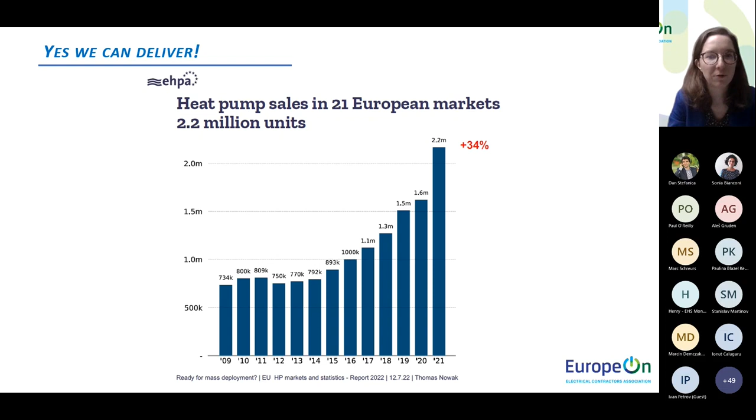One very last slide for me, please. It's about my expectations for today, because I know I remained policy-oriented and a bit high level, without presumptuous comments from myself. So I'm really eager to listen to the other presenters on the different projects they are developing, which will be way more concrete.

I just had a few expectations for today, just to start to engage with the next panelists. First, the need to think upstream. As I said, it's not just about training better the existing workforce, we need to broaden the pool of workers.

Upskilling has some internal barriers, for example the lack of time for people to upskill, maybe the lack of financial means. So how do we deal with that? Reskilling, that I mentioned already.

Of course, we cannot overlook the complementary or so-called secondary skills, such as soft skills, system integration, how you work between different trades, cross-skilling. I also think interoperability is key, so that the trainings provided are agnostic. It's no use being trained in only using one type of heat pump. We really need to have savvy installers.

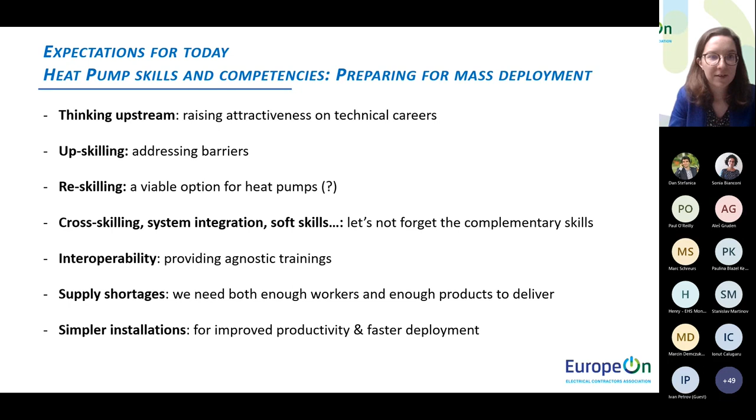Thank you so much, Julie. Real food for thought there, I think, and a great way to start off this webinar.

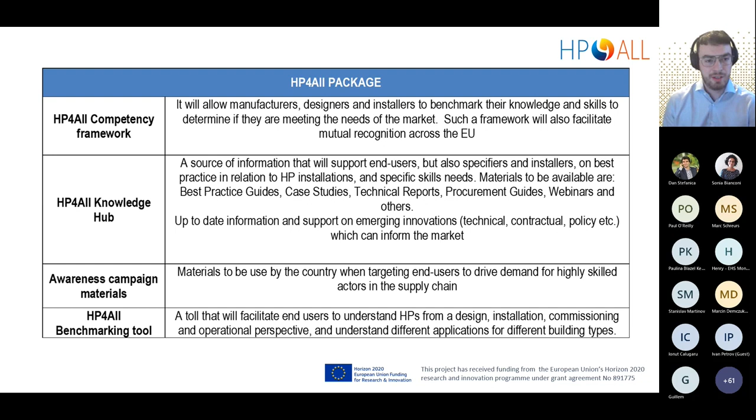So just a quick overview of what we're looking at for the HP4ALL project. I can happily say we've reached our targets for the HP4ALL project. The impacts are based on training of installers, designers, specifiers, procurement officers, policymakers, and so on, and obviously end users too.

We have primary energy savings from this project of 2 GWh per year, based on a calculation I won't get into now, and also renewable production of 1.95 GWh per year, and a reduction of 628 tons of carbon per year. We've over 400 people trained - the latest figure we have is over 500, I think, and it could be more, but around that. So we've 400 people trained in 3 pilot regions.

And each region has their own approach, because each region has different stakeholders, different market maturity, and in our case there were 3 separate languages as well.

So you had to kind of create the resources and the materials based on your stakeholders and based on your market as well. So this is coming into our replication plan. We're going to take this information that each market is different. One shoe doesn't fit all. There's work to be done to find what shoe to put on. That's what I would say.

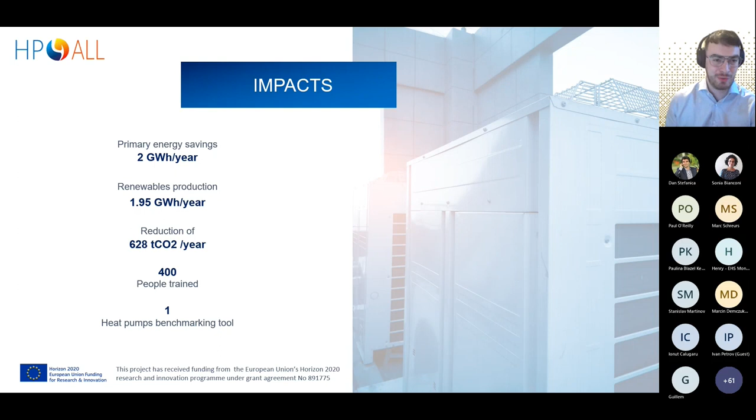Just an overview of the partners. We have EHPA - again, thank you for today. CTA, based in Andalusia. TUS, that's ourselves. IERC, based in Cork in Ireland. RINA, based in Italy. ESV, or Energy Spar, my German's terrible, ESV from Austria, and Sustainable Innovations from Spain. So again, we've worked 30 months with each other, and I think we make a good team, a very open team, a very hard-working team as well. So it's been a pleasure for the last 30 months, I would say, and here's hoping that we'll find more funding for this project, I suppose, going forward.

So today, to talk a bit more about heat pump skills and competencies. So just a bit of background first. Another main output of this project, aside from the heat pump skills and competency framework, is the notion of mutual recognition of skills across Europe. So this is kind of...

I would say it's a touchy subject, and also it's a difficult subject to pinpoint. So we'll go through a bit of background first, and then we'll discuss how the HP4ALL project aims at addressing this. So each EU member state sets out its own national system of education and training.

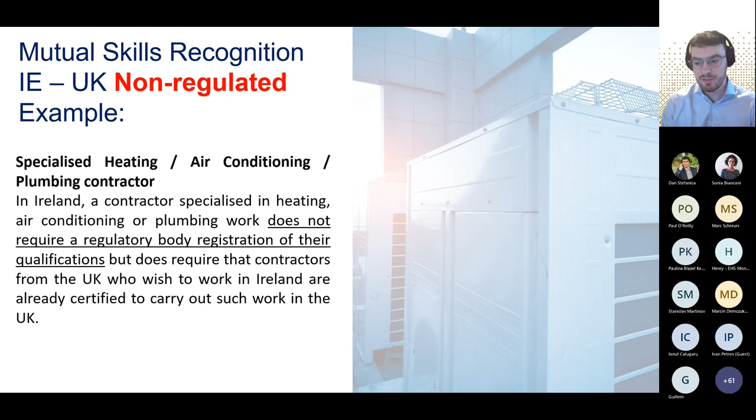A specialized heating, air conditioning, and plumbing contractor - in Ireland, if you're a specialized contractor in heating, air conditioning, or plumbing, you don't require your qualifications to be checked by a regulatory body, but you do require that you already have certification in the United Kingdom. So if you're certified in England, you can kind of work in Ireland, but it's not really written anywhere. It's kind of just an industry tick, saying, yeah, if you have it over there, that's fine. Then you have a regulated body.

An air conditioning professional - like I gave the example of the electrical contractor, now we're looking at an air conditioning professional. A qualified contractor based in another European Union country, or the United Kingdom, is required to provide proof of qualifications in refrigeration, whether that's an apprenticeship in refrigeration, mainly a national certificate level of around 6 in Ireland - I think it's around 5 in the European framework.

The contractor also must be F-gas compliant. All this documentation has to be checked by a regulatory body in order for this person to work in Ireland, and that's the main difference between the two.

So there are some trades that have this unspoken law and unspoken rule that if you have one, you have the other. But with regulated bodies, or regulated trades, there's more nuance - and I wouldn't say nuance, there can be more issues with it if it's not done correctly.

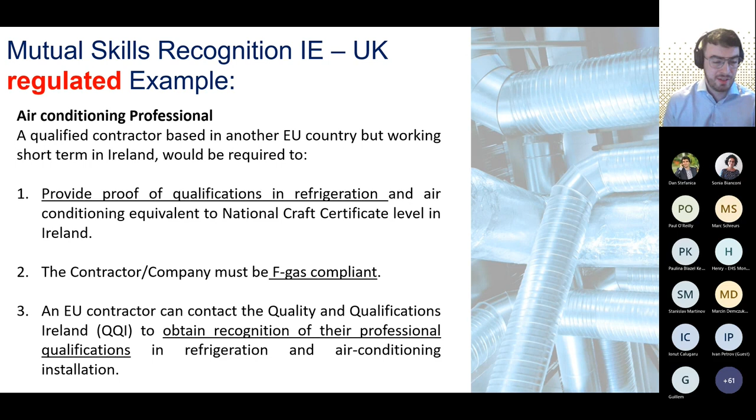For example, air conditioning with refrigerants - if refrigerants leak, that's a big problem, especially for emissions. So that's why it's regulated, because if there are leaks, you have to make sure it's a competent person, to reduce those likelihoods of leaks.

So how does HP4ALL want to get into this minefield that is mutual recognition of skills? We can't directly force upon competency bodies or third-level education or apprenticeships to sign a waiver saying anyone who works in Ireland in heat pumps can work in Austria, for example. It's too complicated for that - there are too many actors involved.

This is more of a start on the road to mutual recognition, that's what I would say. So the agreement is signed by the HP4ALL project representation and another regional actor, you could say.

The document is intended to commence a dialogue with the objective of mutual recognition of skills, so heat pump skills gained in one region can be recognized in another. I've put it in there just to make sure it's not legally binding in any way. It's just a start on this road to mutual recognition.

There can be various ways to do it. It doesn't have to be your apprenticeship people talking to our apprenticeship people, coming together and saying the syllabus is pretty similar, we can sign off on that. It can also be things like an EU-wide academy. We'll have all options open, that's what I would say. There's no point in focusing on one way of doing it. There has to be multiple ways of doing this.

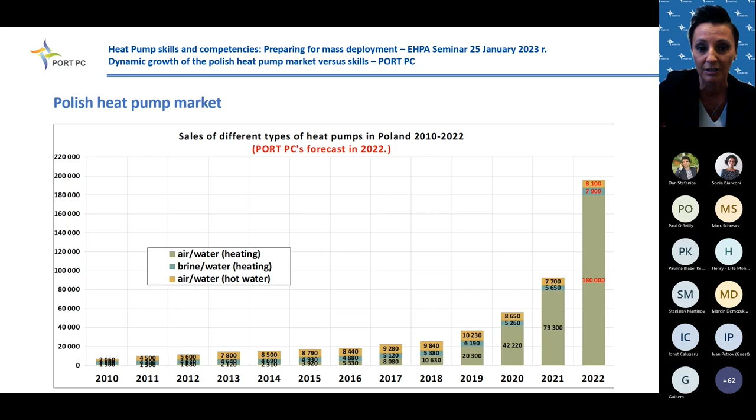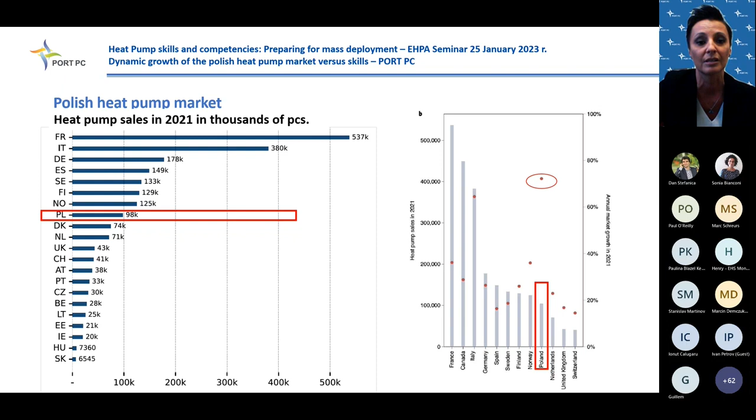This was the forecast, but if we look at last year's sales of heat pumps in Poland, we can see it was more than 90,000 units. But if you look at the increase, it was also quite a big increase, more than 70% increase of the market. So we can see that our country, after 2022, could rank really high if we speak about heat pump sales statistics in Europe.

We estimate that sales increased not as much as after the first half of the year, but it will still be quite a big growth, because 122% is a big growth, hyper growth of the heat pump market. I think Poland could be number one if we speak about such a big increase.

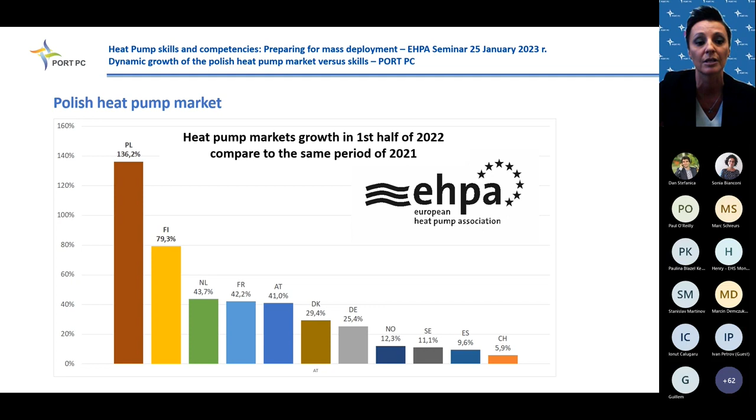Why is that? Why did that happen in 2022? There are some main drivers of the hyper growth in Poland, but at the first place I will choose the impact of the subsidies, the finance support in Poland right now, because as you can see, we have a few programs that are really attractive for the end user, for investors, especially if we speak about the residential market. We have 3 main subsidy programs.

The first one is retrofit tax relief. It is not a subsidy or grant, but a deduction of expenses for retrofitting investments from the amount of income tax calculating base. According to that, people can save some money for retrofit activities in their houses.

The main program that we have right now is Clean Air. Clean Air subsidy is for renovation, so you can exchange an old boiler for a new one that fulfills the eco-design requirements. But mainly people choose heat pumps, especially last year, and I will show you at the next slide how it looks if we speak about the share of heat pumps in subsidy applications.

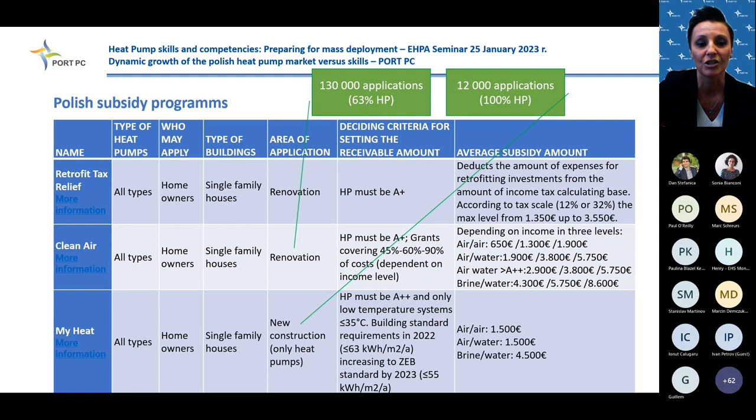So we will just help to make the new buildings as much energy saving as it's possible.

And if we speak about this statistics, here you have the graph that shows the share of heat pumps in applications for subsidy in the Clean Air Subsidy program, for retrofit houses, for renovation.

You can see that something happened, as everybody knows what happened in February. And since February, there is a big change in the share of heat pumps in applications. At the beginning, heat pumps had nearly 25%, 28% of the share in the applications for subsidy, and then it goes up to 60% right now.

After, in the second half of the year, every month reached more than 60% share of heat pumps in the applications for subsidy.

And if you look at the yellow line, this is for gas boilers. At the beginning, gas boilers were the main source chosen in this clean air program, for renovation of houses it was 40% share in the applications, and then it goes down to 20%, and it was kept during the second half of the year.

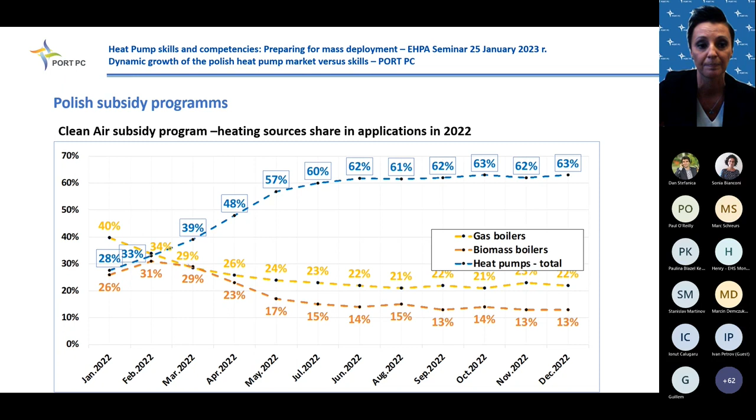So to have a look at the situation in Poland, there is a graph that shows that in Poland in 2018, the main heating source was the coal boiler, then gas boiler, and also pellet boilers, and then at the top of the pyramid, with the small amount of units installed, it was heat pumps.

Then the situation changed in 2020. We can see that coal boilers decreased, gas boilers stayed at a high level, and pellet boilers also made quite big increases. And of course heat pumps started to increase, and we can speak about this big boom for heat pumps in Poland since 2020.

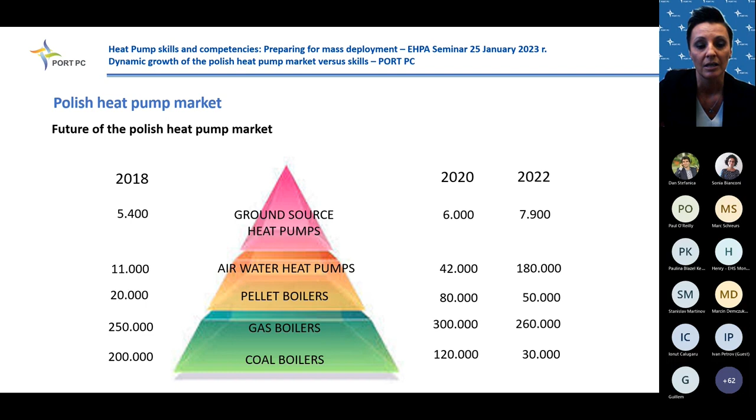And then in 2022, you can observe a quite big decrease in fossil fuel boiler installations, and also a little decrease in pellet boilers. But you can see that heat pumps were pushed to the top level of the pyramid. So this is the situation right now, and I hope it will be stable for the next 10 years.

Yeah, this was the statistics for our market. And now I want to tell you about some good practices that we will have in Poland.

First of all, I want to tell you about the project of industry skills centers. It is a new project, implemented in September 2022 as a competition for institutes to establish such skills centers. Right now there will be the end of this competition, and we will know how many and who will manage these skill centers.

And also, as PORT PC, the Polish organization of heat pump technology development, we also will apply for the financing of such training centers. The plan for this year is at least 20 such training centers created by the end of 2023, and another 100 centers by the end of 2024. In this project, there were 120 fields defined, and one center will be established in each region.

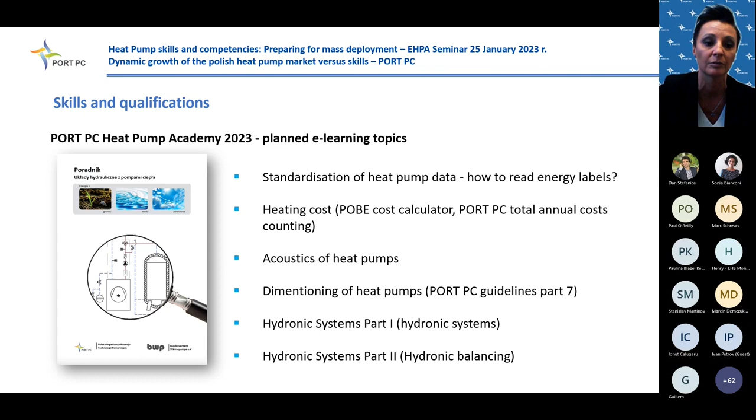If we speak about this standardization of data provided by heat pump manufacturers, it's a really important topic in Poland right now, because last year many new brands appeared in Poland, and in some cases it's quite hard to find energy labels or product fiches for the heat pumps. So it's really important to push everybody to use the same data.

So for sure we will promote the heat pump keymark and EHPA quality schemes in Poland. And we will push everybody to use product labels and energy labels, and everybody should have access to the PDF files with these parameters.

For example, energy class, ETA S, SCOP in the cold and average climate zones, sound power level and heating power, and things like that. All these parameters should be taken from the product label and energy label, so we speak with the same voice and the same standards.

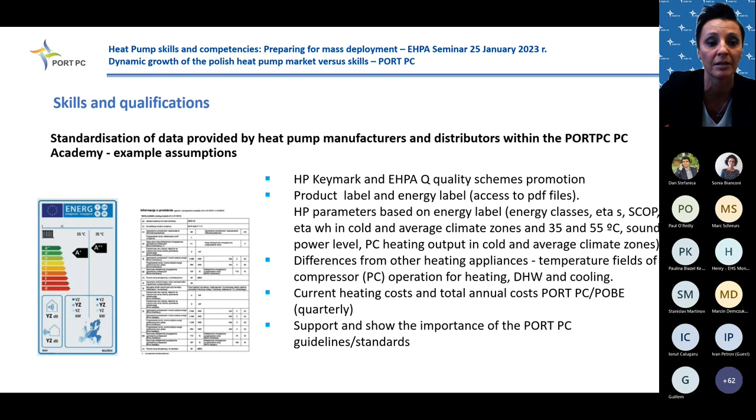I was happy that I could show you how it was in Poland, because right now everybody is asking what is going on, why there is such a big boom in heat pumps in Poland, and everybody is wondering if next year we will still have the same big increase in our market. So thank you very much.

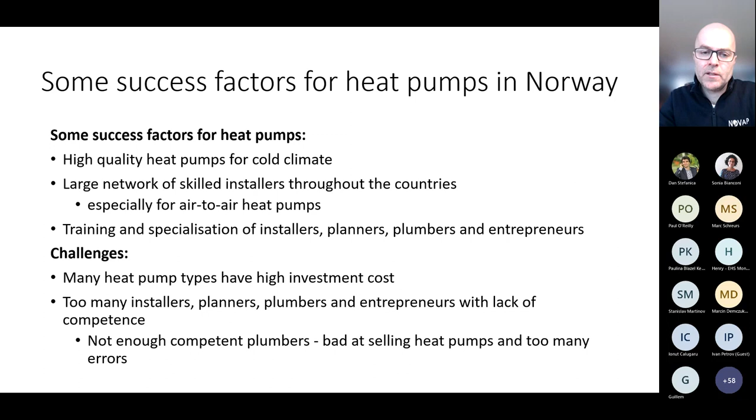And when it comes to heating in all kinds of buildings, electricity is the main heating source together with electric heat pumps. And you will see the same in Sweden and Finland too. Of course, there you will see more district heating than in Norway. We also have district heating, but not as much as in those countries and in Denmark.

But we differ a lot from the rest of Europe since we have a much larger share of renewable energy, or renewable electricity. Like 98% of our electricity is renewable. So electric heating is much more common in Norway compared to the rest of Europe, where gas or district heating from fossil sources are dominating for the moment.

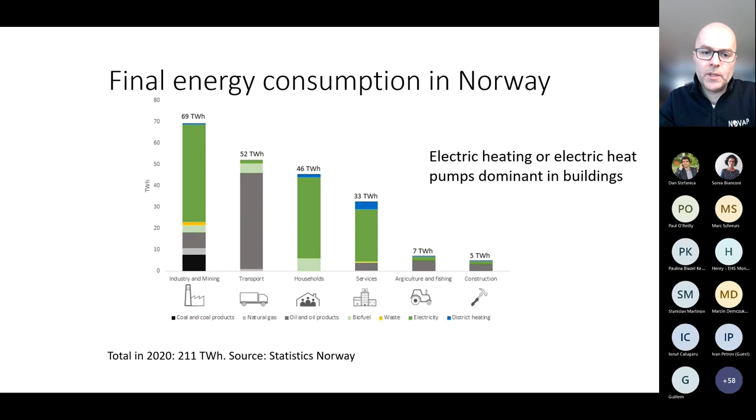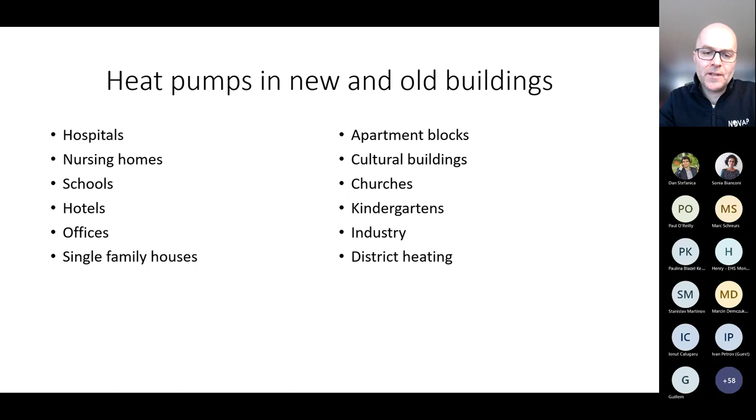As I said, we have heat pumps in all kinds of new and old buildings. I'm not going to list them all, but as you see, there are lots of different buildings where heat pumps are common. This is our sales development.

Most buildings have direct electric heating, and we don't have as many buildings with waterborne or hydronic heating systems as we have in the rest of Europe. This is something we try to change.

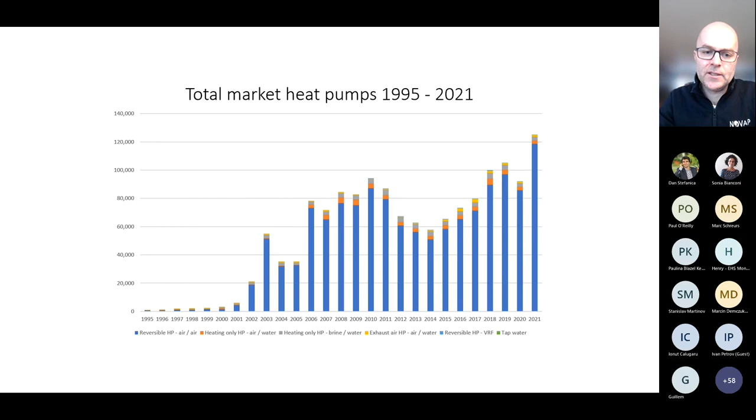So here you see the figures on the amount of heat pumps sold until 2021. So you see that air-to-air heat pumps are dominating. Of course, we also have air-to-water and brine-to-water, but the share is much smaller than, for instance, Sweden and Finland. They also have lots of air-to-air heat pumps, but they also have many more air-to-water and brine-to-water heat pumps.

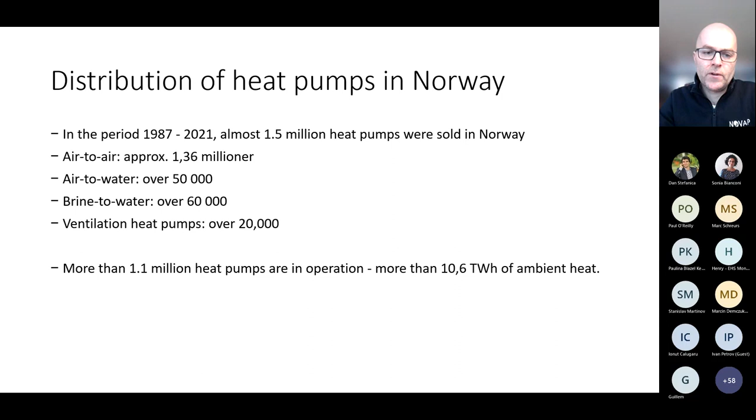So just to show some pictures of air-to-air heat pumps, for many of our European colleagues it seems strange that we have so much air-to-air heat pumps in a cold country as Norway, but the air-to-air heat pumps that dominate in Norway are high-quality heat pumps that work down to -25, and the COP is quite good, actually down to -15 or -20.

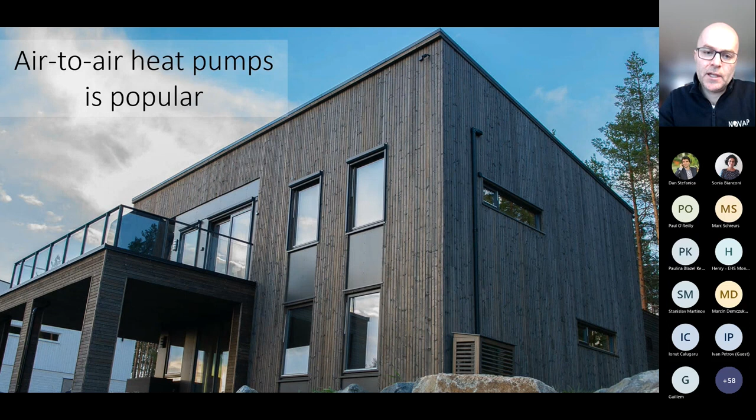But of course, in an old, not well-insulated house, air-to-air heat pumps cannot be the only heating source. So very often air-to-air heat pump is an important heating source, but we have direct electric heating or use of wood stoves as additional heating. But in small energy efficient houses, quite often an air-to-air heat pump is the main heating source throughout the whole year, and it's only at the coldest days that you need additional heating. But that depends on the size of the house and how well insulated it is.

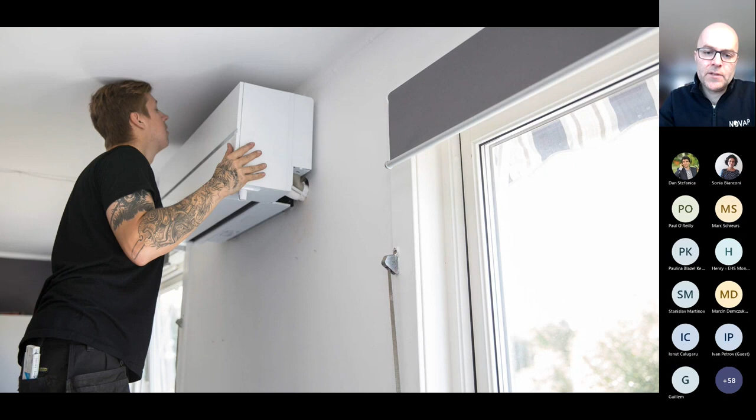So here you see a common air-to-air heat pump. More and more people use them also for cooling during summer, but it's mainly bought as a heating device. In many other European countries, they are mainly used for air conditioning, but in Norway the driving market is for heating. So you have wall hanging units and you have floor mounted heat pumps.

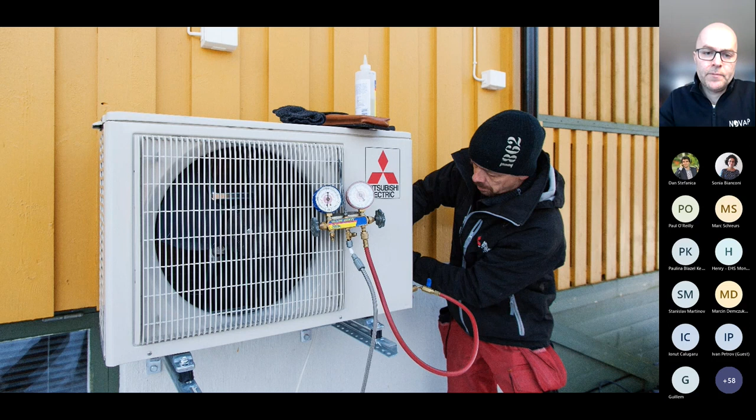This is a common outdoor unit. More and more mountain cabins have them. So of course they have to work where it's lots of snow and where it's cold. And of course we also have air-to-water heat pumps in both new and old buildings.

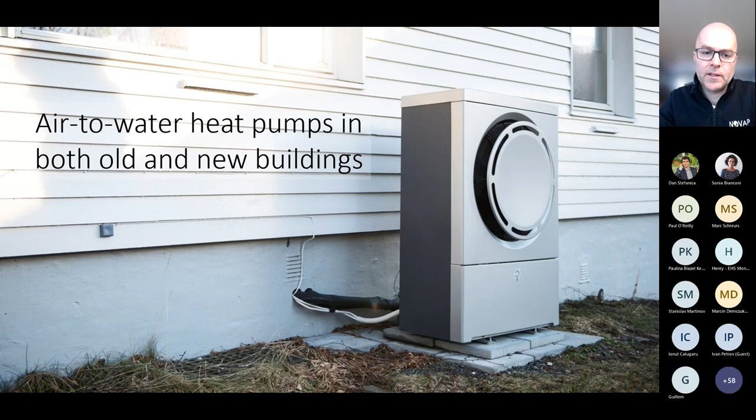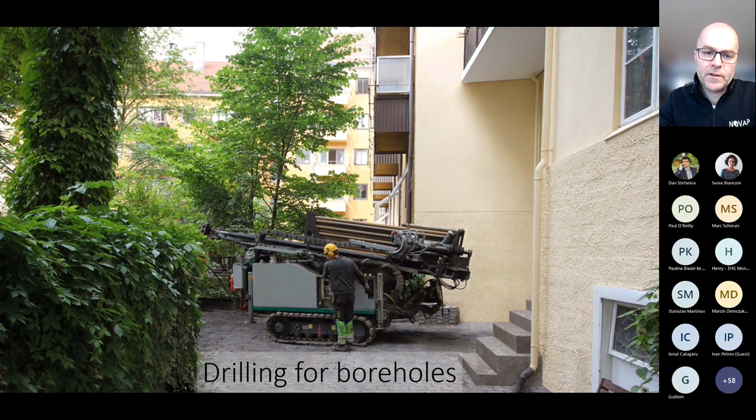Ground source heat pumps are normally more robust in old buildings with high temperature heating systems. We have drilling or drillers all over Norway for all kinds of buildings. This is for a multi-family building. This is for a single family building.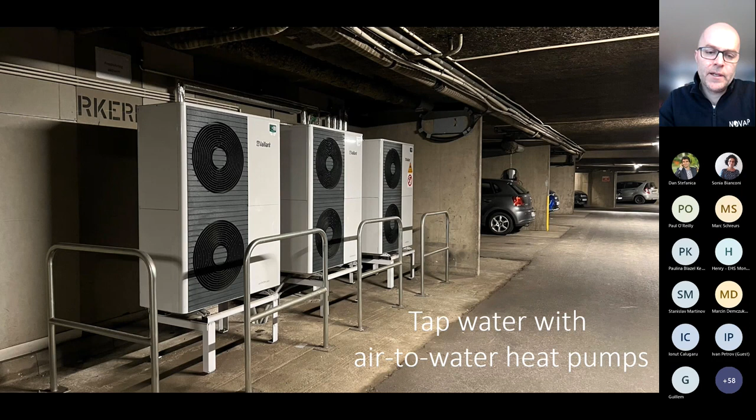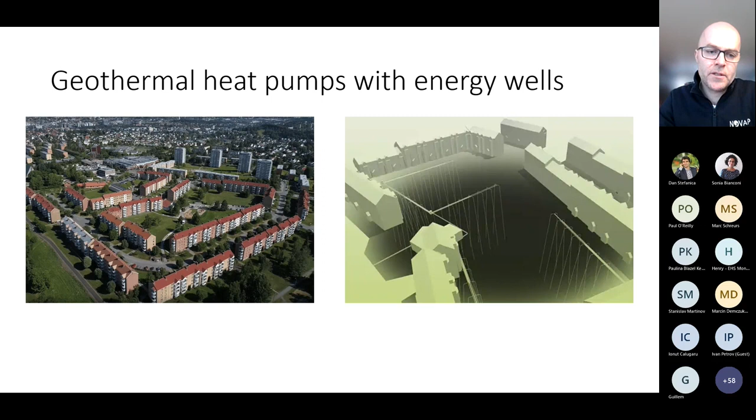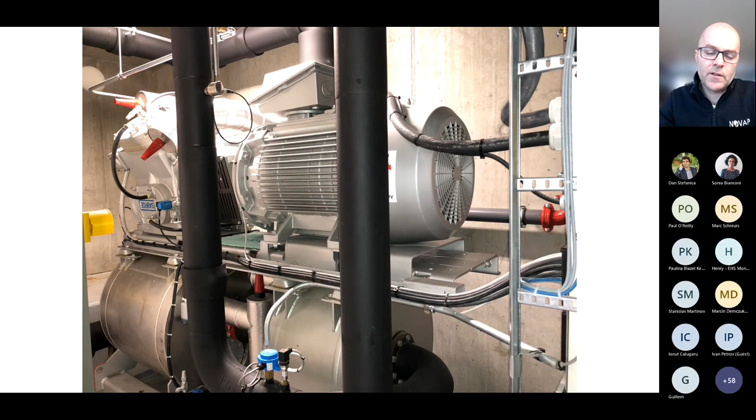So the reason why I show all these buildings is to show you that the heat pump market is quite diverse. So you have some installers that only work with small air-to-air heat pumps and others that are skilled and work with more complex heat pumps, and some are also specialized only on natural refrigerants. And also you have the large industrial heat pumps and large heat pumps that we have in district heating.

So who is doing what? Because quite often we talk only about the installers, but you have engineers that design the heating systems in larger buildings, and you have heat pump engineers that are specialized on the heat pump itself, but they might not be specialized on how to design a good hydronic or heating system. You have lots of engineers and plumbers that are designing heating systems that don't necessarily know the conditions needed for a good heat pump system.

You have lots, unfortunately too many, plumbers that don't have sufficient training in heating systems and heat pumps, even if they are doing installations. Quite often they just get support over the phone from some of the importers, but too many of them don't have the necessary skills to do good installations. And you have refrigeration and heat pump technicians that normally specialize on larger heat pumps, refrigeration systems, freezers, and many of them don't work with heat pumps for households.

So the market for air-to-air heat pumps is dominated by installers that are electricians or that have other kinds of backgrounds, that have been to our or other members' courses to learn how to install heat pumps. Those that are specialized on heat pumps, that are educated in heat pumps, they normally work with larger systems. Of course some of them also install smaller heat pumps, but the market for smaller heat pumps is normally dominated by either plumbers or electricians and others that have just been doing training courses. They are not necessarily educated.

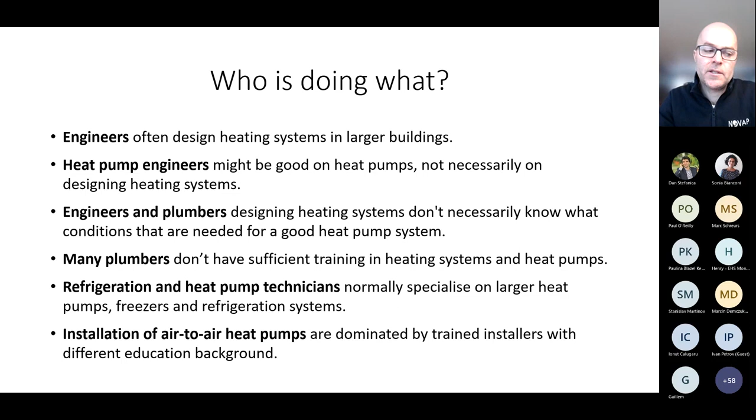So what do we have in public education in Norway? We have a vocational education system. We have different kinds of vocational education, for electricians and plumbers and different kinds of professions, but this is for the refrigeration and cold and heat pump technicians. The 2 first years are the common education for working with refrigeration, heat pumps, and ventilation.

Then they get more specialized the 3rd and 4th years, when they are a trainee out in a company. It's also possible to have fewer years, only 1 year at school, and then do the rest of the education at a company with guidance. It's also actually possible to do all the education at the company, but this is the most normal way to educate themselves.

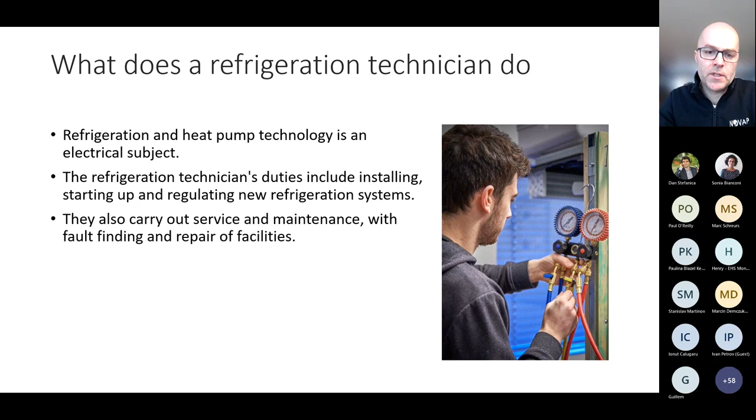So they are learned installing, how to start up and regulate and do maintenance on these heat pumps and refrigeration systems. And also we have the plumbers, who have the same education system, but half a year longer apprenticeship. So they either have 2-year education, 1-year education, or 4.5 year trainee.

But what is a challenge is that the education system for plumbers for the moment is not good enough for heat pumps and hydronic systems. So they are depending on doing courses and being trained after the education. Also, after you have become a plumber or a heat pump technician, you can go to a technical college for 2 more years, and you need some extra education to go further for an engineer degree.

Or there are also, of course, lots of students that had all kinds of background that go directly to a bachelor degree or master degree in heat pump engineering. So what do we do? I will show it short.

Since 2000, we have had different kinds of training systems. We started with a general theoretical education system from 2000, and then we started with a practical course from 2004, specialized for air-to-air heat pumps. Then in 2008, 2009, we designed a heat pump course for engineers for larger heat pump systems.

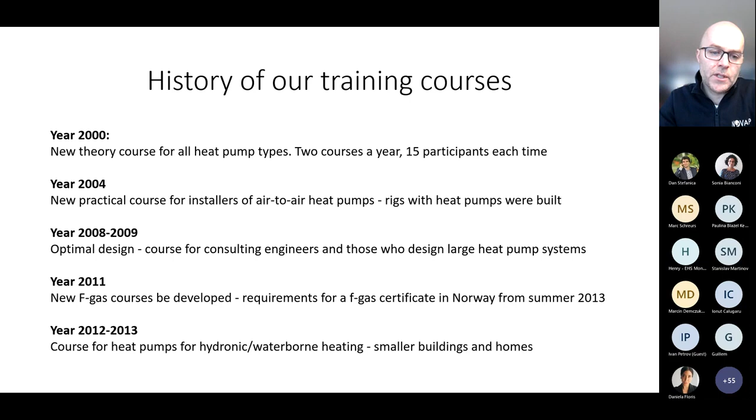And then we introduced the F-gas regulations first in 2013, so we introduced our first courses in 2011. And then we have had courses for hydronic systems from 2012. So we are the largest training provider for heat pumps in Norway.

Lots of people go through our website where they can find out our courses. I will show some of them. For the moment, we have 10 different courses and 4 new ones being established.

So the most popular course is the F-gas regulation course, because if you're working with several kinds of heat pumps, you need that kind of certificate. And we are kind of strict, so you are not allowed to do our F-gas training or take the exam without having the proper formal education from before. If not, you have to do our basic air-to-air heat pump installation course.

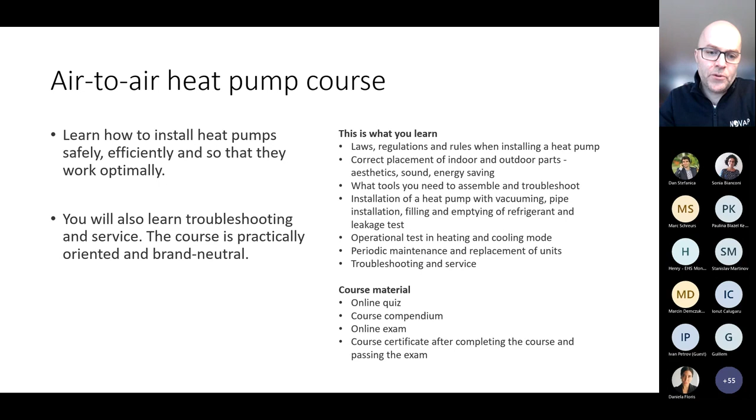And then we have lots of other courses too, but I will just show a few of them. So we have an air-to-air heat pump course where you actually learn what you need to do when you plan, install and maintain an air-to-air heat pump. It shows here what you learn and what kind of material you get, and you can go through this presentation later if you want to look at the slides.

We also have courses for flammable refrigerants, because we see that the use of flammable refrigerants is growing rapidly in Norway. We are doing a lot of cooperation with others, so several actors are using our training material, and several actors are doing marketing on training courses. They tell installers to go to our training courses or do our training with some of the actors we cooperate with. Last year, together with cooperating association actors, we trained 1,100 persons on different kinds of courses.

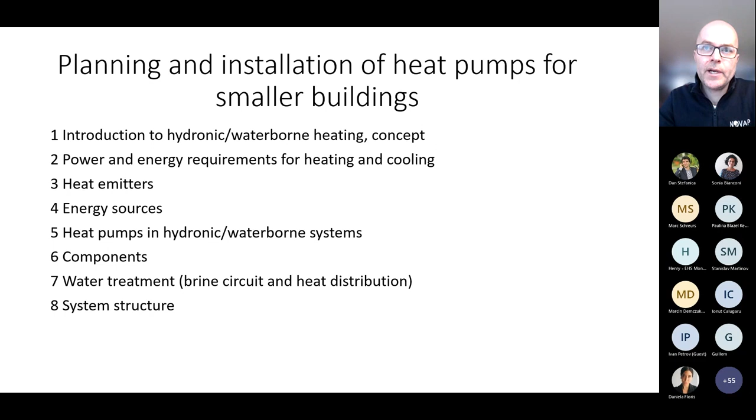So in short, to end up, we are working with new courses also, a new course on heat pumps for hydronic systems, and the training that we have. I will show you just short. We are also working on making guidelines for different kinds of buildings, and for some years in the former education committee, EHPA had a cooperation with other countries to try to find out what kind of training courses do you have, how many days are the courses, and what topics are covered.

I will not use more time now, but there are challenges: there should be more mandatory certification schemes in Europe. We don't have that, so we are discussing now how strict our training courses and exams should be, and how we can attract more people to take our courses. We also have big consumer websites, and we try to stress all the time that there's too much focus only on the heat pump itself, but it's at least as important that you have a good installation. Then you need skilled installers.

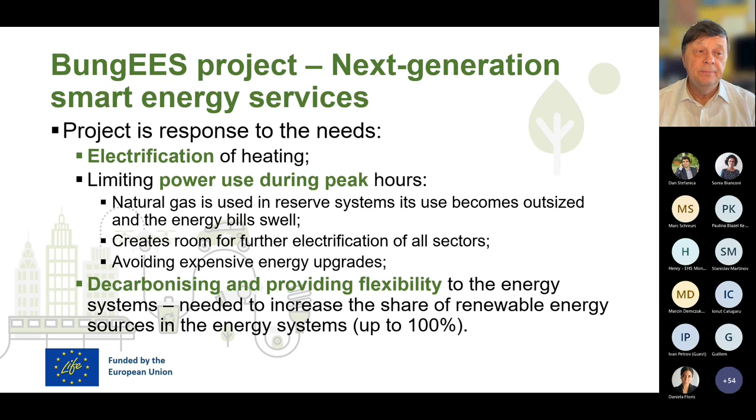So why mentioning our project? It is because heat pumps are only part of the story. It is not just to make a promotion for the project we are doing. We need to keep in mind that...

We need to install smart energy systems that are integrating energy efficiency with heat pumps, renewable energy sources, mainly solar, wind, energy storage, hybrid systems, electric vehicle charging, and smart orchestrate all these energy assets in the buildings using smart energy services that are based on demand response to save energy, increase energy performance, harvest flexibility from buildings, to provide flexibility to energy systems, as I already mentioned, and to replace carbon-based energies and fuels.

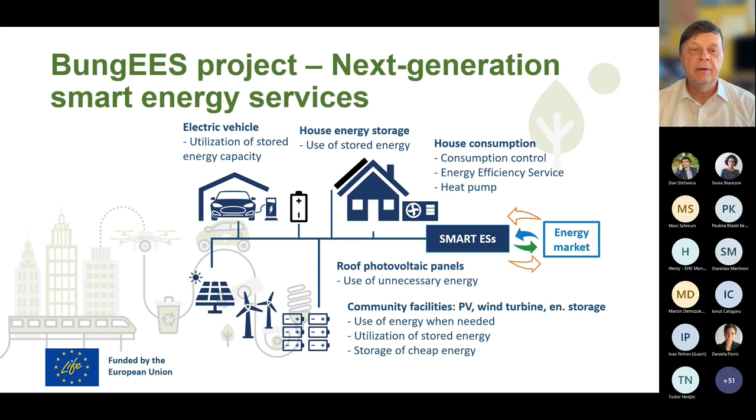In our consortium, operators coming from Portugal, Spain, France, Italy, Germany, Czech Republic, Slovak Republic are providing energy services to over 10 million households in 7 countries. And this includes also countries outside of our consortium, like Slovenia, Greece.

So what we are trying to do in order to develop their business and to facilitate mass rollout, not only heat pumps, but smart energy systems, we are focused on developing new business models that are underpinning a one-stop shop approach in this sector. I think that is already a known term, so I will not go into details.

And we are well on the way to commercialize the first service package within the project, that will have potential for mass rollout on the mentioned markets.

We are also innovating the services by integrating non-energy services, for example, by monetizing non-energy benefits, because it has been proven that non-energy benefits are an important motivation factor on the side of consumers to undertake energy renovation of their dwellings. Therefore, in order to facilitate the growth that is needed, we believe that non-energy services need to be included in our service packages.